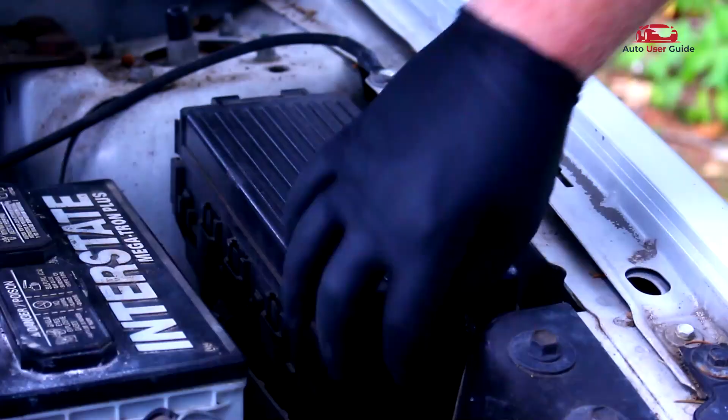Are you trying to locate the fuse box in your 2004 to 2010 Kia Sportage? In this video, we're checking out all the fuse boxes from the engine compartment to the cabin area. I'll show you where they're located and explain how they keep your SUV's electrical system safe and running smoothly.

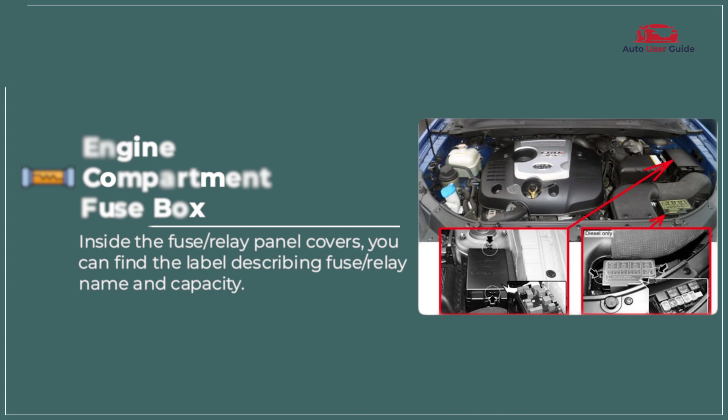Engine compartment fuse box. The engine compartment fuse box in the 2004 to 2010 Kia Sportage is designed to protect major engine, lighting, and electrical circuits. It contains essential fuses and relays that ensure proper operation of critical vehicle systems. Its layout allows easy access for inspection, troubleshooting, and quick fuse replacement.

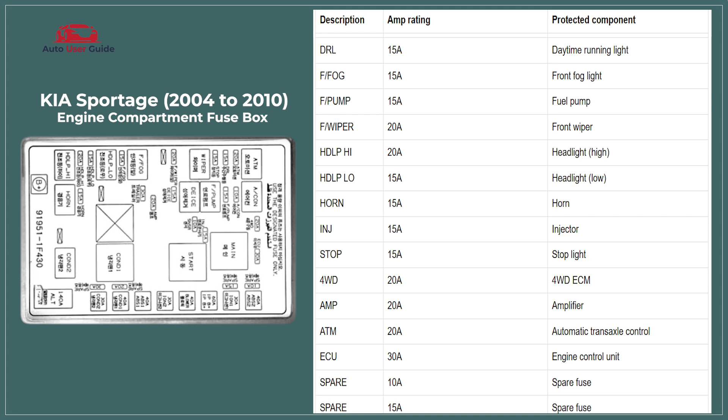The sub-panel in the engine compartment, diesel only, for the 2004 to 2010 Kia Sportage provides added protection for diesel-specific electrical components.

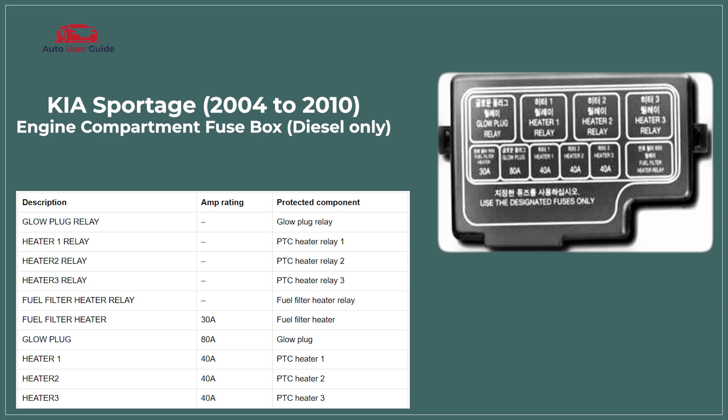Instrument panel fuse box. The instrument panel fuse box in the 2004 to 2010 Kia Sportage protects interior electrical systems such as the dashboard, audio, lighting, and climate controls. It organizes fuses for passenger convenience and safety. Its accessible location allows quick inspection and easy fuse replacement.

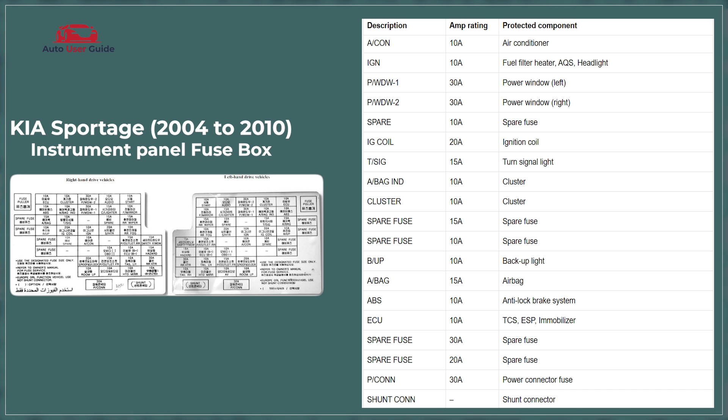Type of fuses: blade fuse, standard blade fuse, mini blade fuse, maxi blade fuse, micro 2 fuse, micro 3 fuse, J-case fuse.

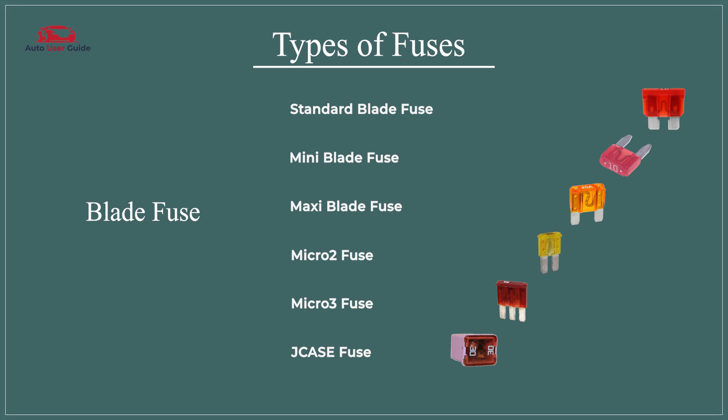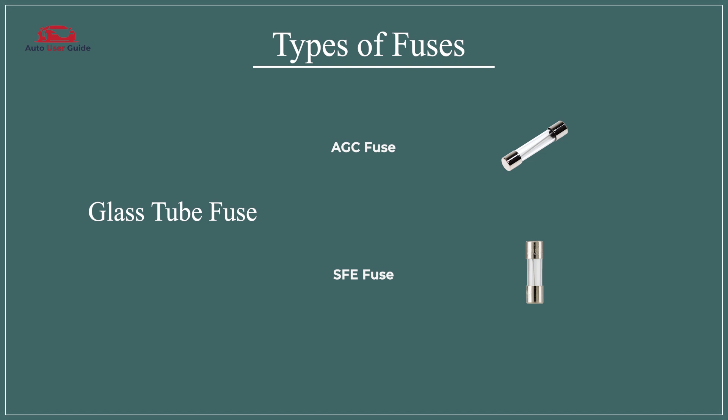Glass tube fuse, AGC fuse, SFE fuse. Ceramic fuse, Bosch fuse, DIN fuse.

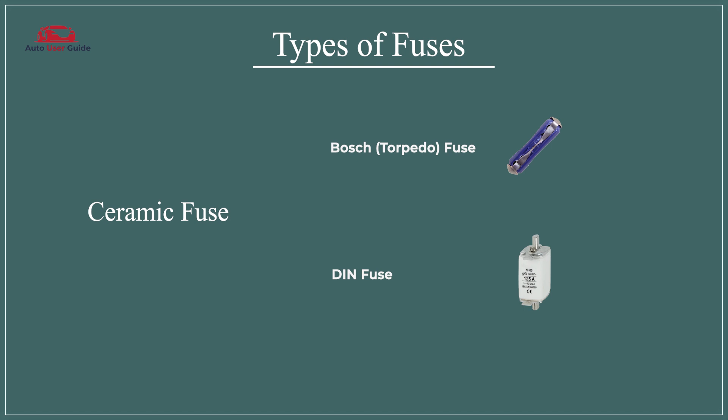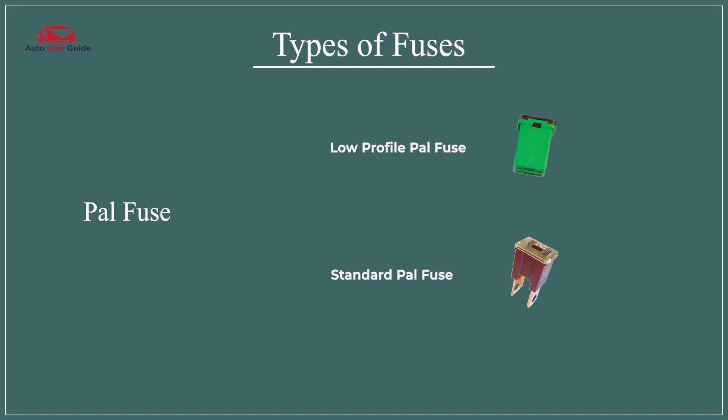PAL fuse, low-profile PAL fuse, standard PAL fuse, link fuse, mega fuse, high amperage link fuse.

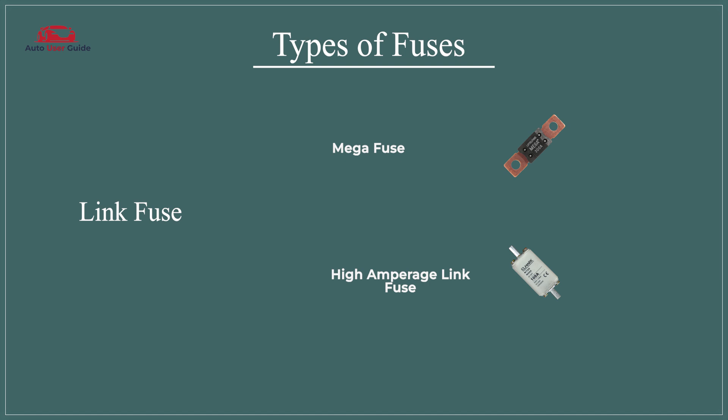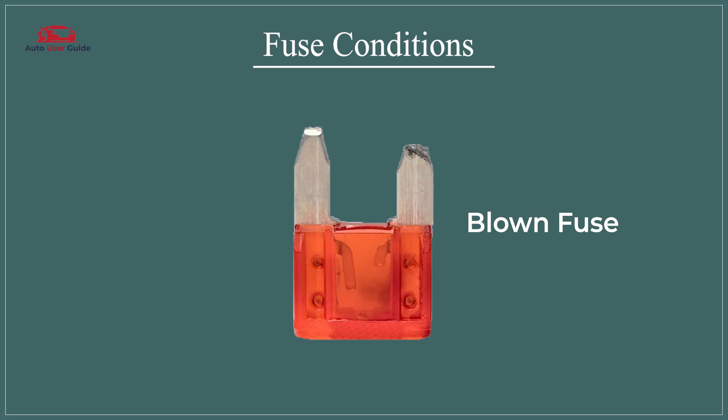Fuse conditions. Blown fuse: a blown fuse means it's no longer functioning and needs replacement, while a perfect fuse is in good working condition and performing as expected.

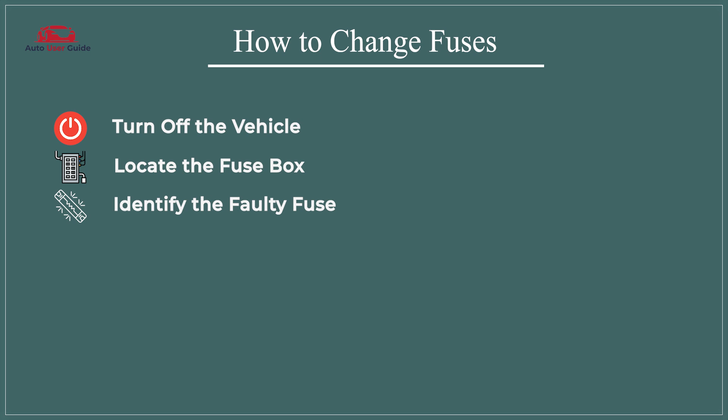How to change fuses: turn off the vehicle, locate the fuse box, identify the faulty fuse, remove the faulty fuse, inspect and obtain a replacement, install the new fuse, test the replacement.

Safety precautions: disconnect the battery, wear protective gear, use proper tools, check for correct amperage, avoid water exposure.